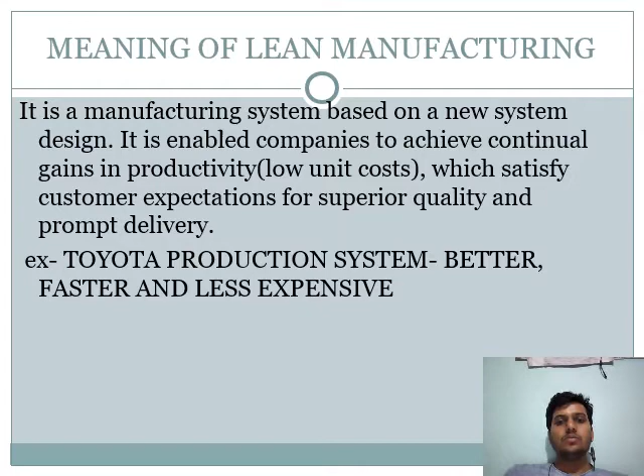So basically it focuses on the customer's desire or customer needs for better quality. An example of lean manufacturing was first implemented by the Toyota Production System, for better, faster, and less expensive products. These were the targets of that company, the Toyota Production System.

Particularly, we do more by employing less — that is lean thinking, as we call it. Lean manufacturing involves never ending effort to eliminate or reduce waste. The Japanese term 'Muda' refers to waste, or any activity that consumes resources without adding value, in the processes of design, manufacturing, distribution, and customer service.

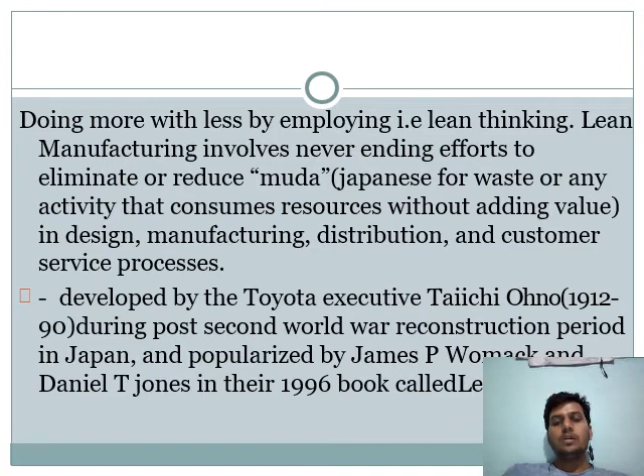It was developed by Toyota executive Taiichi Ohno, during the post-Second World War reconstruction period in Japan, and popularized by James P. Womack and Daniel T. Jones, who published this material in a book called 'Lean Thinking'.

Lean manufacturing is a philosophy that considers the expenditure of resources, other than for the direct creation of value for the end customer, to be wasteful. Thus it is targeted for elimination.

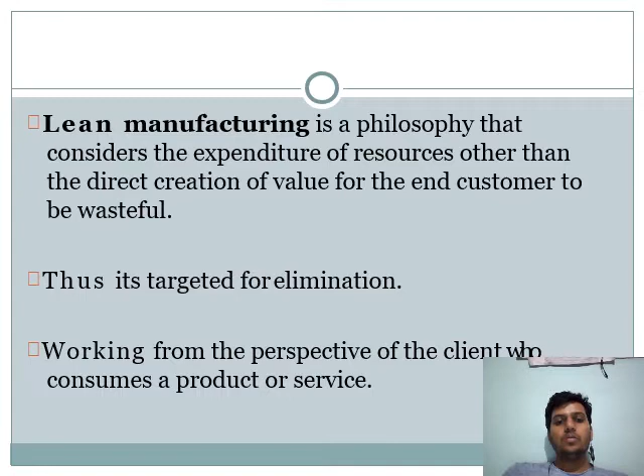It works from the perspective of the client who consumes a product or service. So it's a business model, or a collection of tactical methods, that focuses on eliminating non-value added activities or waste, while delivering a quality product on time, at least cost, with greater efficiency.

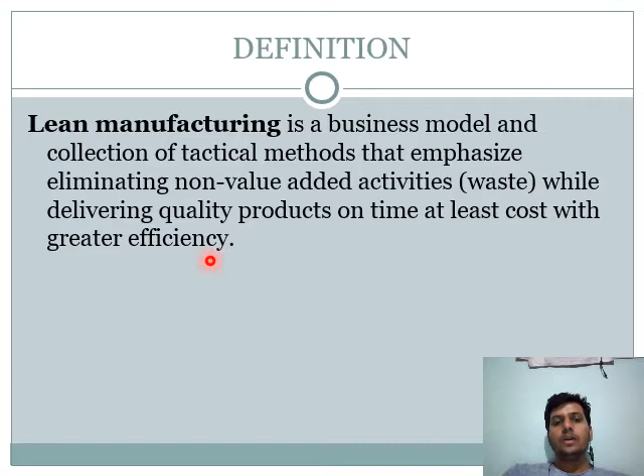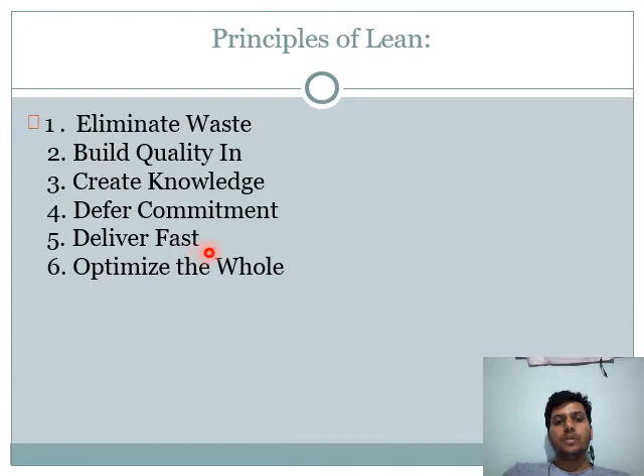The major principles of lean manufacturing are to eliminate waste, to build in quality, to create knowledge, defer commitment, deliver items fast, and optimize the whole process.

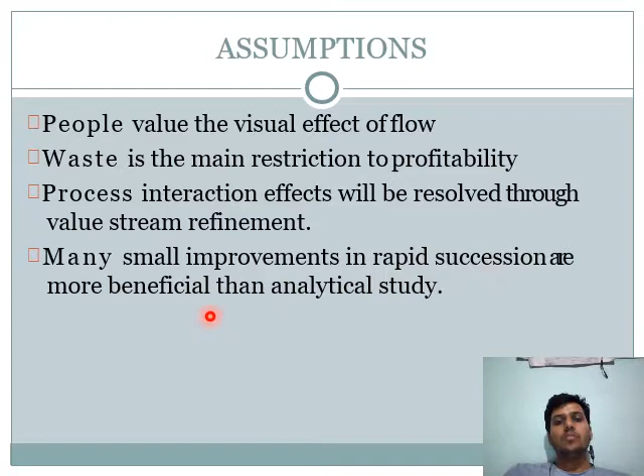The major steps in lean production are: first, identify the value — at a specific price and specific time we identify the value of the item. Then we identify the value stream, which is the entire sequence of activities.

The third step is to improve the flow. The fourth step is to allow customer pull. At this stage, in the process, lean manufacturing and just-in-time are identical.

The next step in lean manufacturing is to only manufacture what the customer orders, so that customer demand or pull drives company production. Our main focus is on customer needs, and we make changes as per those needs.

This is similar to just-in-time, in that new parts are ordered based on short term requirements, but the driving force behind the efficiency of the process is customer value rather than cost reduction. As the company learns more about what the customer really wants, it repeats the process over and over again, with the goal of creating the perfect product at the perfect price.

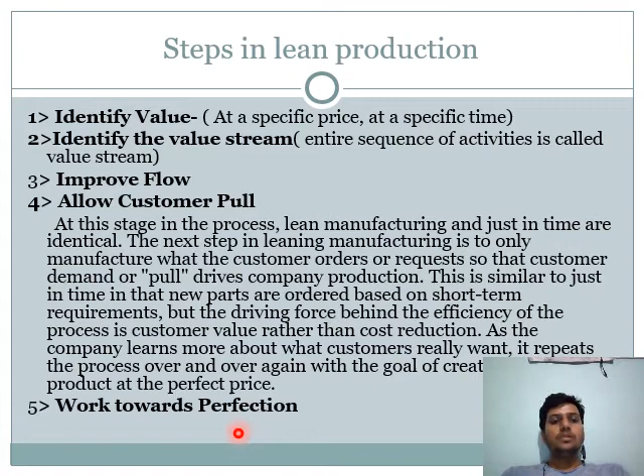So the target is to create the perfect product at the perfect price. The company learns more about customer needs particularly, and the next step is to work towards perfection, or implementation.

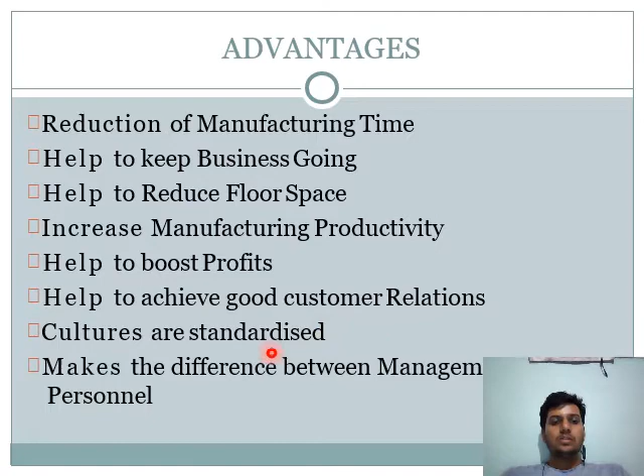The advantages of implementing lean manufacturing include reducing manufacturing time, helping business, reducing floor space, increasing manufacturing productivity, boosting profits, improving customer relations, and setting cultural standards that reduce the difference between management and personnel.

The tools in lean manufacturing are: first, cellular manufacturing. This is a process or cell that produces families of parts within a single line or cell of machines, operated by machinists who work within that line or cell.

The machinists work in a line or cell performing the same operations, producing the same parts of a part family. So we produce a part family with a single line or cell of machines. They form a small-scale, clearly defined production unit within a larger factory.

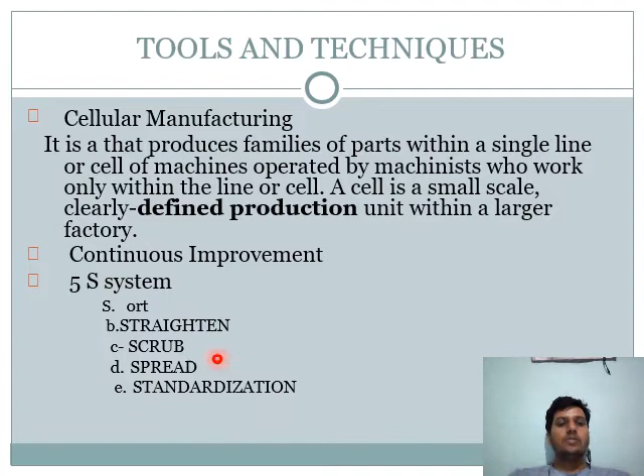The second tool is continuous improvement. The third is the 5S system: sort, straighten, scrub, spread and standardize. In lean manufacturing we have parameters like cost, quality, and delivery times. Different tools include just in time, Jidoka, takt time, pull, flow, and man-machine separation. Other tools are 5S, Kaizen, and stability. 5S is for stability, and these tools are used for continuous improvement.

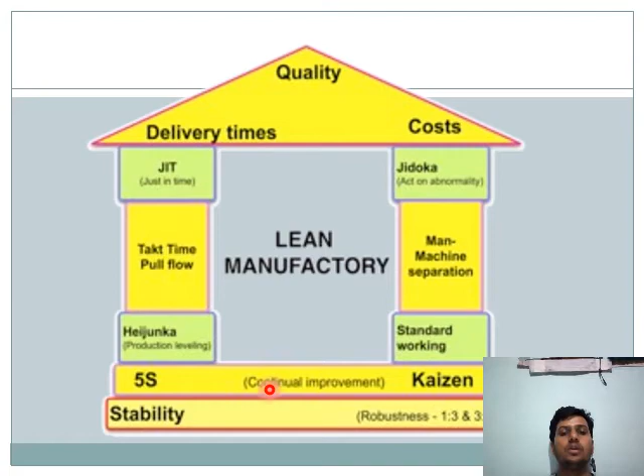The 5S tools are: Seiri for sorting and cleaning classify; Seiton for straightening, simplifying, setting in order, and configuring; Seiso for sweep, sign, scrap, clean and check; and Seiketsu for standardize, stabilize, conformity, sustain, self-discipline, custom, and practice. In the next slide we will see these 5S tools one by one.

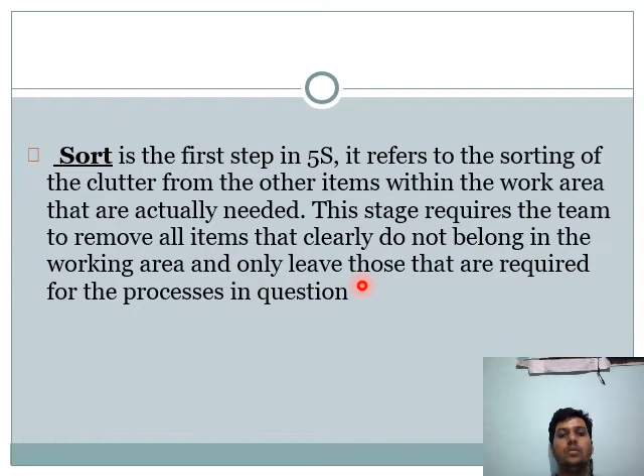The first tool is sort, the first step in 5S. It refers to sorting clutter from other items, differentiating which items within the work area are actually needed. This stage requires the team to remove all items that clearly don't belong in the work area, leaving only those required for the process in question.

The second step is set in order. This is the process of taking the required items remaining after removal of clutter and arranging them efficiently using ergonomic principles, ensuring every item has a place and everything is in its place at the desired location.

The next step is sweep. Sweep is the thorough cleaning of the area, tools, machines, and equipment to ensure everything is returned to a near-new status. This ensures non-conformities stand out, such as an oil leak from a machine onto a newly painted clean floor, so these can be removed.

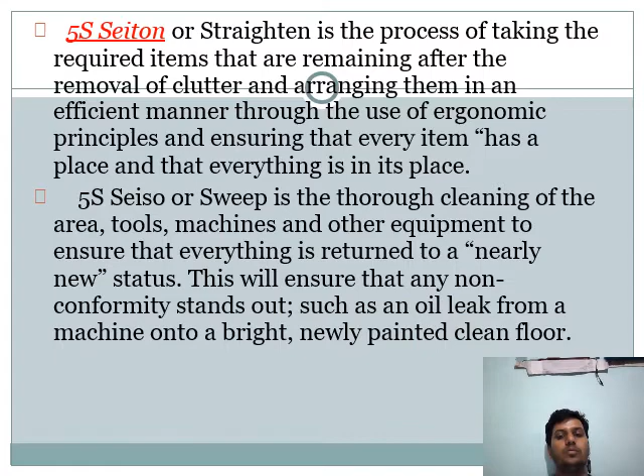The next 5S is standardize, the process of ensuring what we've done in the first three stages of 5S becomes standardized, so we have common standards and ways of working. Standard work is one of the most important principles of lean manufacturing.

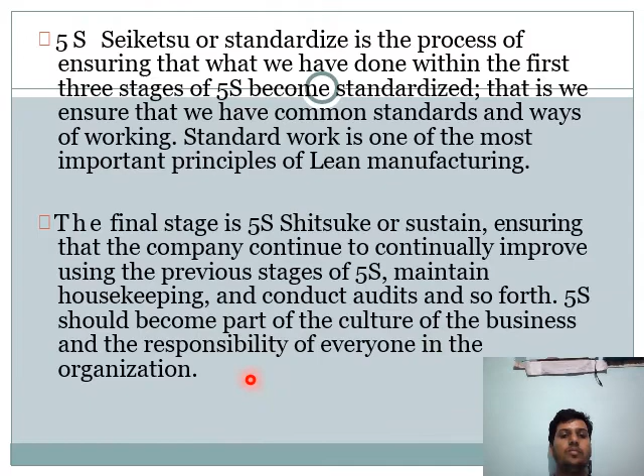The final stage is sustain: ensuring the company continually improves using the previous stages of 5S, maintaining housekeeping, conducting audits, and so forth. 5S should become part of the culture of the business and the responsibility of everyone in the organization.

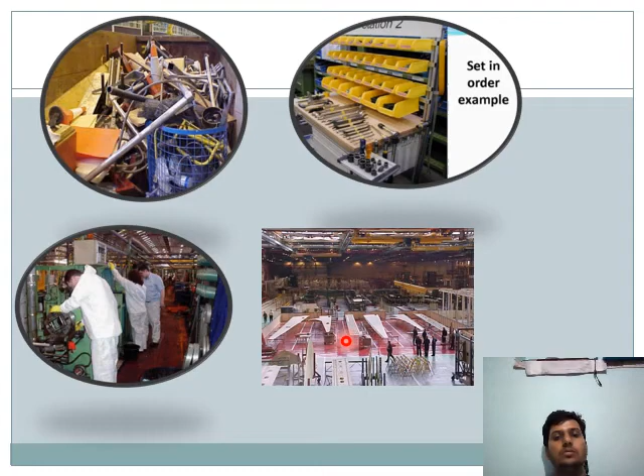There are other tools in lean manufacturing. Lean manufacturing and just-in-time are often treated as the same thing but are not identical concepts. Just-in-time manufacturing focuses on efficiency, while lean manufacturing focuses on using efficiency to add value for customers. Just-in-time can be practiced on its own or as one step in the lean manufacturing process. Other tools include production smoothing, total quality management (TQM), and total productive maintenance (TPM). Other waste reduction techniques used include zero defect, setup reduction, and line balancing.